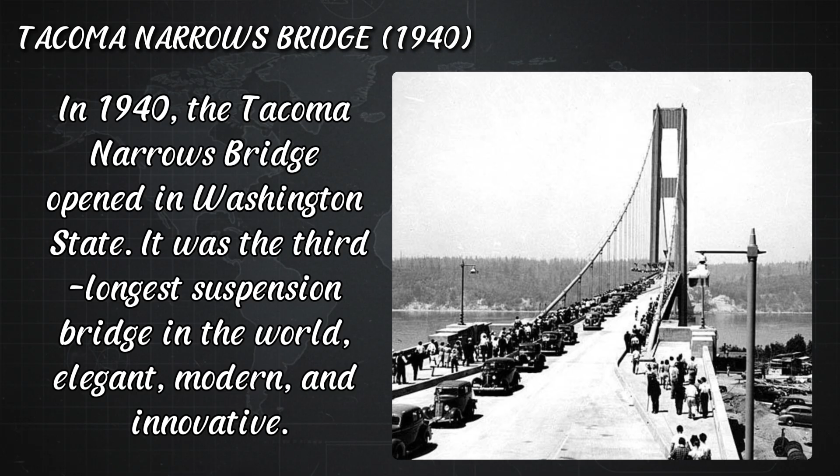The Tacoma Narrows Bridge, 1940. In 1940, the Tacoma Narrows Bridge opened in Washington state. It was the third longest suspension bridge in the world, elegant, modern, and innovative. Engineers had designed it to be lighter and more flexible than previous bridges, using a new streamlined deck design.

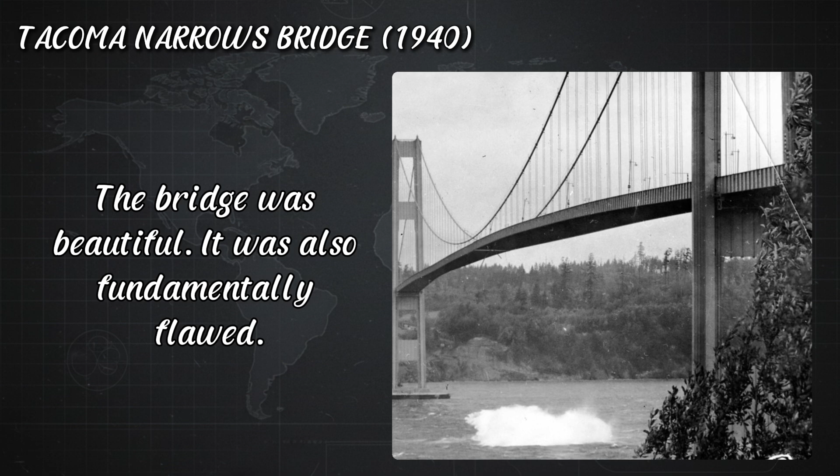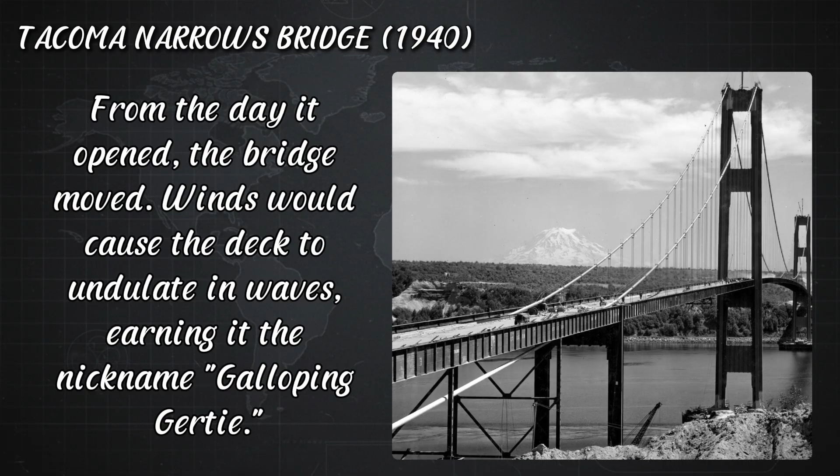The bridge was beautiful. It was also fundamentally flawed. From the day it opened, the bridge moved. Winds would cause the deck to undulate in waves, earning it the nickname Galloping Gertie. Drivers reported feeling seasick crossing it. Some people drove to the bridge just to experience the thrill of the rolling deck.

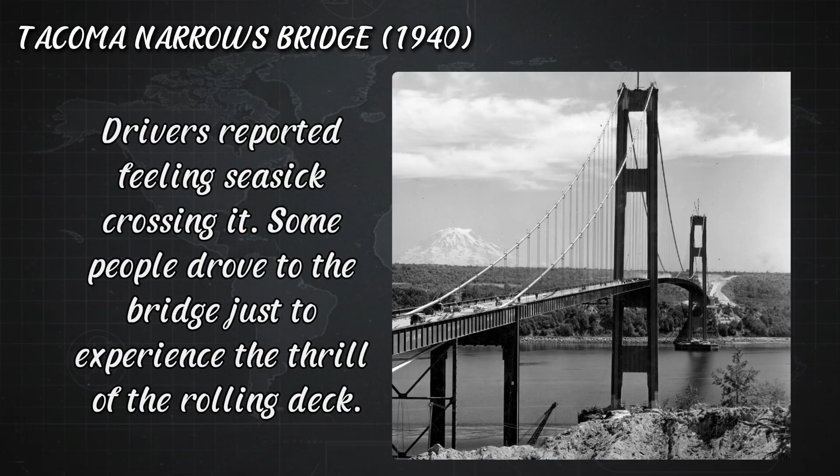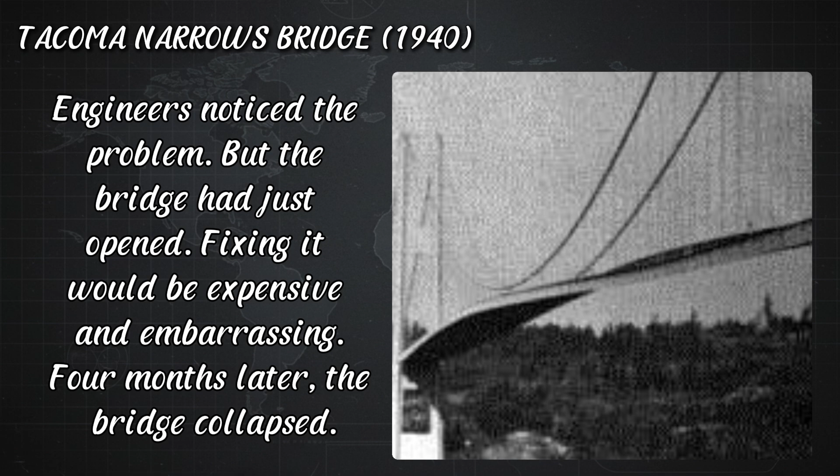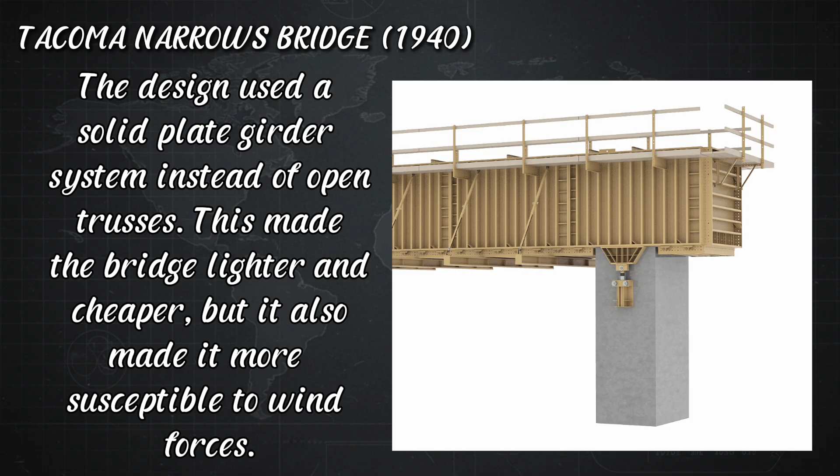Engineers noticed the problem, but the bridge had just opened. Fixing it would be expensive and embarrassing. 4 months later, the bridge collapsed. The design used a solid plate girder system instead of open trusses. This made the bridge lighter and cheaper, but it also made it more susceptible to wind forces. The narrow, flat deck acted like an airplane wing. Wind could create aerodynamic lift and torsion.

Civil engineer Leon Moisseff, the designer, had used mathematical formulas that worked for static loads, but he didn't account for dynamic wind forces, the way wind could interact with the bridge's shape to create oscillations. When engineers noticed the dangerous movements after opening, they proposed solutions: wind baffles, cable stays, modifications to the deck. All were rejected as too expensive or too disruptive to traffic.

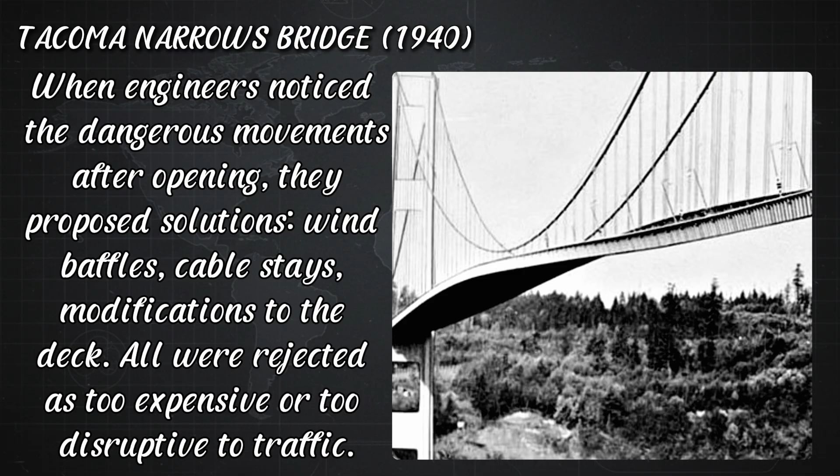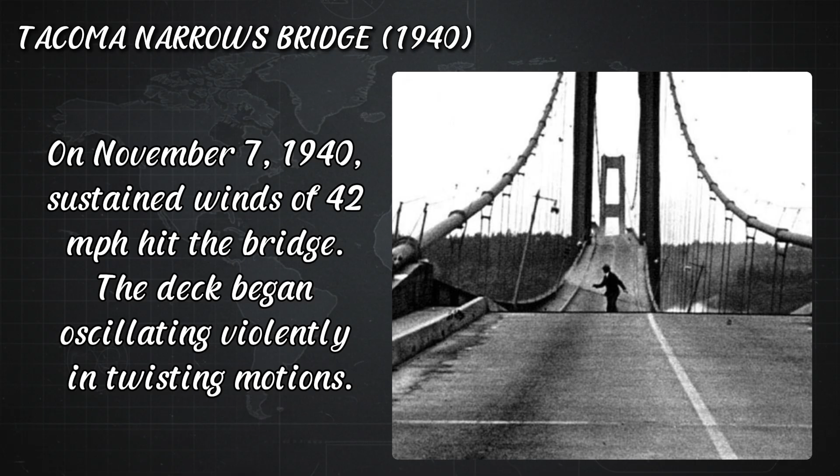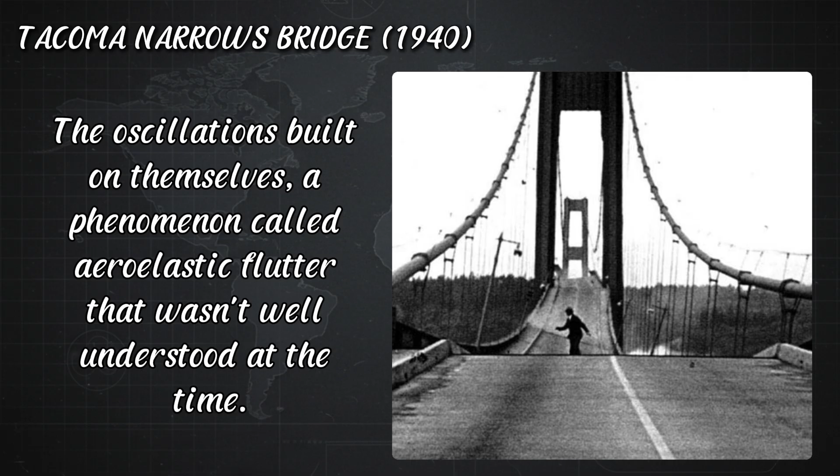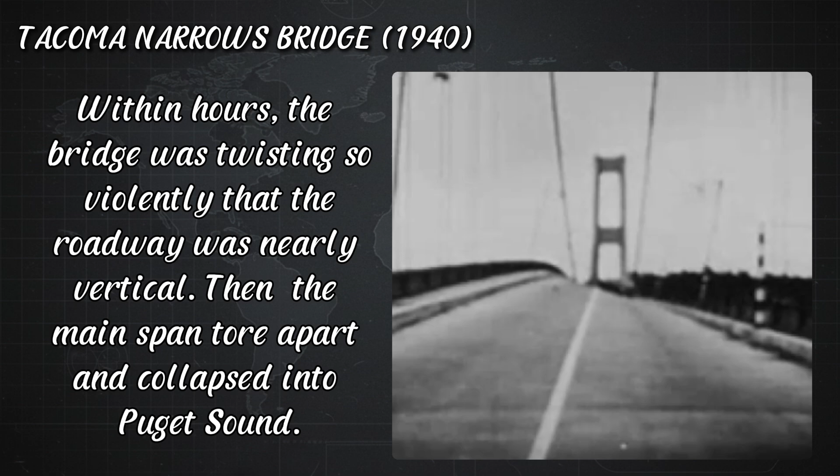What went wrong? On November 7, 1940, sustained winds of 42 miles per hour hit the bridge. The deck began oscillating violently in twisting motions. The oscillations built on themselves, a phenomenon called aeroelastic flutter that wasn't well understood at the time. Within hours, the bridge was twisting so violently that the roadway was nearly vertical. Then, the main span tore apart and collapsed into Puget Sound.

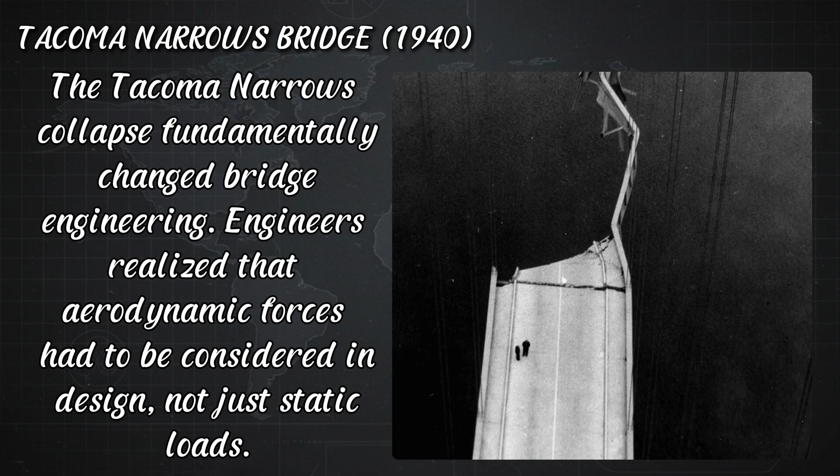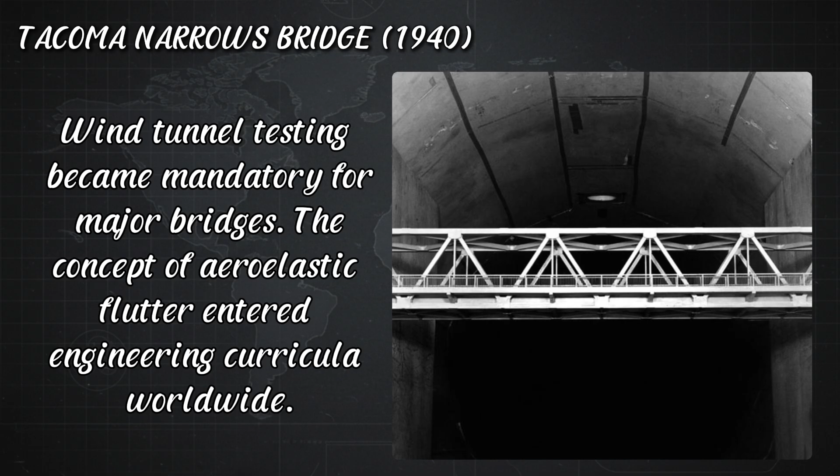The consequences. The Tacoma Narrows collapse fundamentally changed bridge engineering. Engineers realized that aerodynamic forces had to be considered in design, not just static loads. Wind tunnel testing became mandatory for major bridges. The concept of aeroelastic flutter entered engineering curricula worldwide.

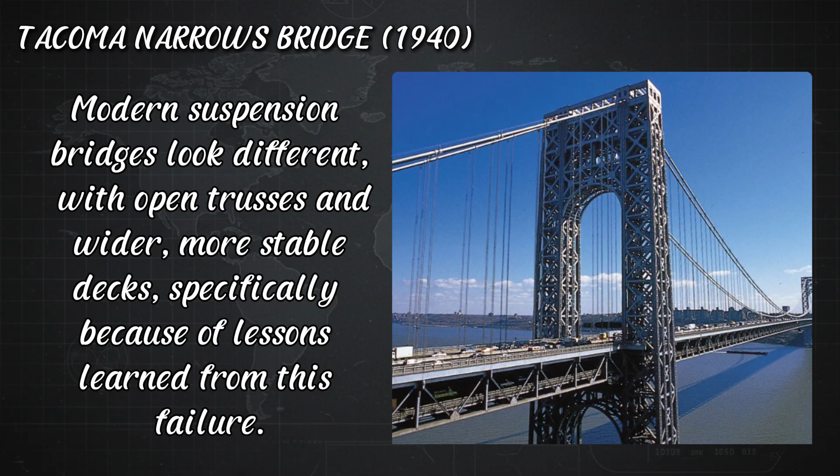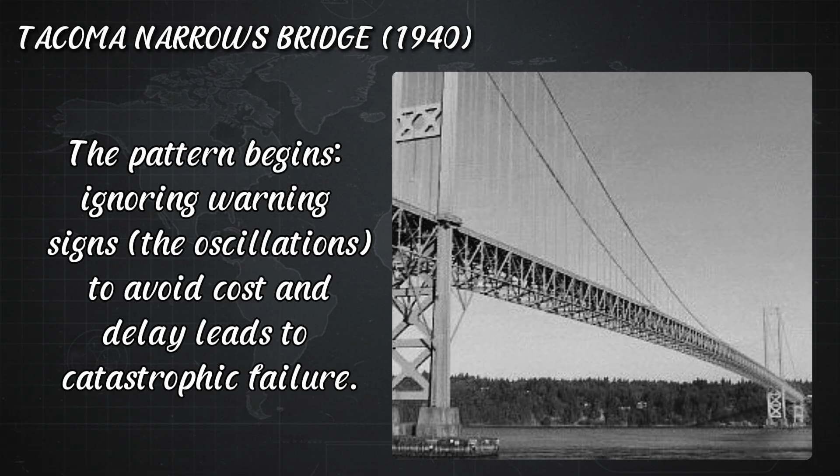Modern suspension bridges look different, with open trusses and wider, more stable decks, specifically because of lessons learned from this failure. The bridge was rebuilt in 1950 with a completely different design. It's still standing today. The pattern begins: ignoring warning signs, the oscillations, to avoid cost and delay leads to catastrophic failure.

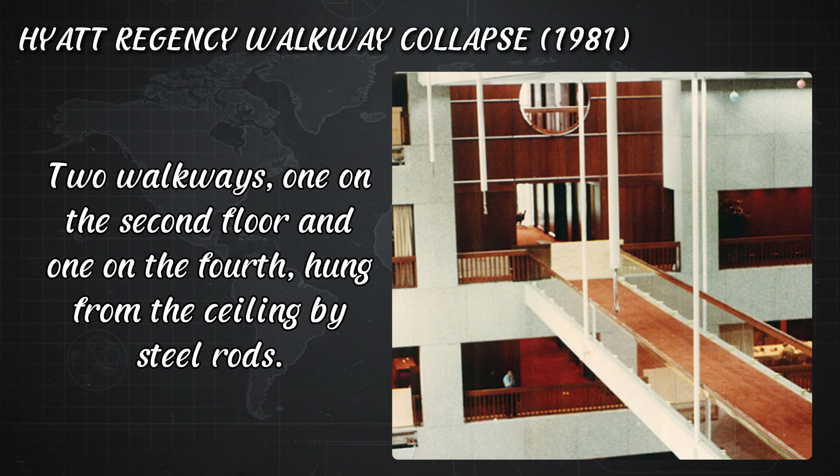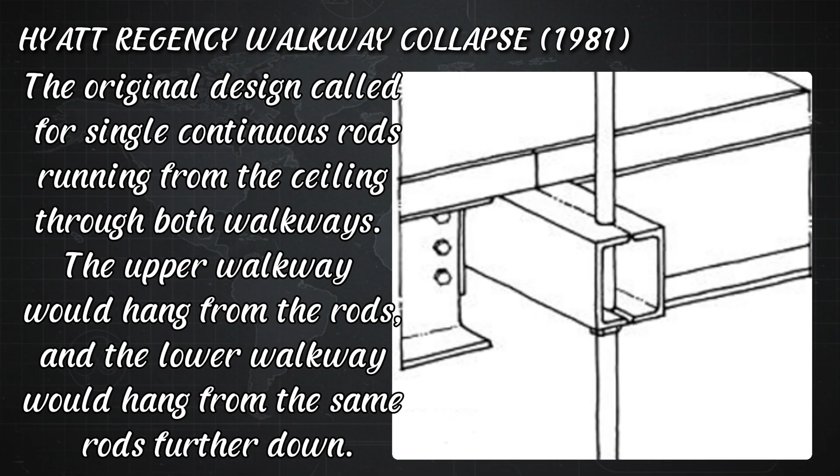The Hyatt Regency Walkway collapse, 1981. The Hyatt Regency in Kansas City was a stunning modern hotel featuring a multi-story atrium with suspended walkways connecting the buildings across the open space. 2 walkways, one on the 2nd floor and one on the 4th, hung from the ceiling by steel rods. The original design called for single continuous rods running from the ceiling through both walkways. The upper walkway would hang from the rods, and the lower walkway would hang from the same rods further down.

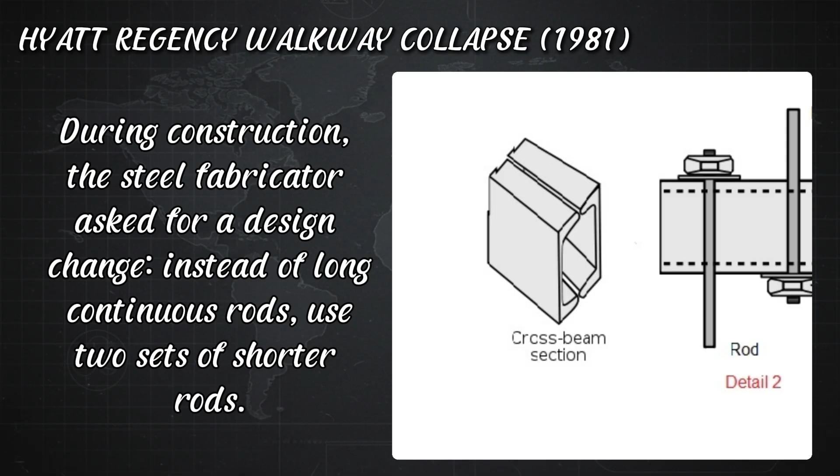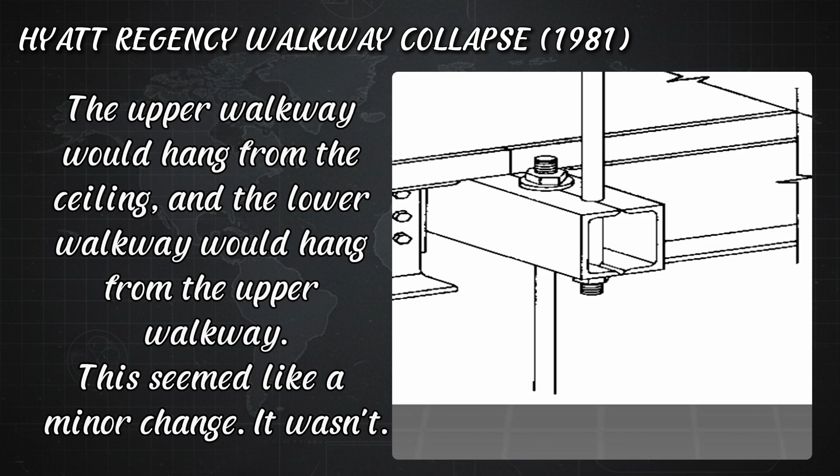During construction, the steel fabricator asked for a design change. Instead of long, continuous rods, use 2 sets of shorter rods. The upper walkway would hang from the ceiling, and the lower walkway would hang from the upper walkway. This seemed like a minor change. It wasn't. The original design had each walkway supporting only its own weight. The modified design meant the upper walkway had to support both its own weight and the lower walkway's weight, essentially doubling the load on the critical connection points.

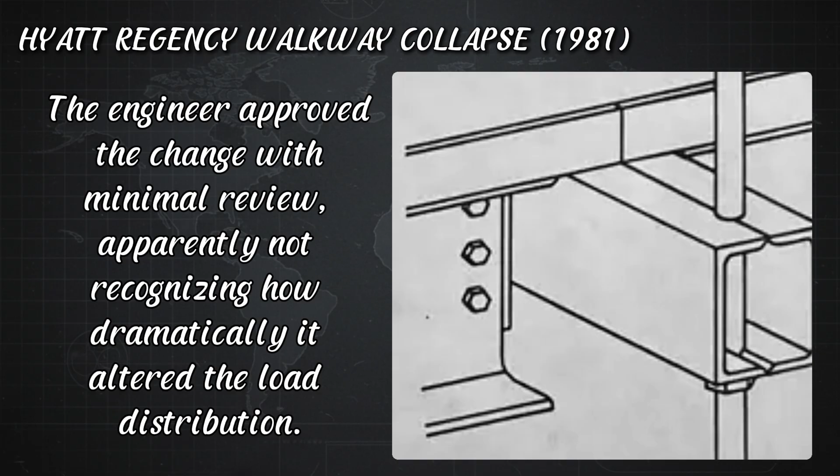The engineer approved the change with minimal review, apparently not recognizing how dramatically it altered the load distribution. The fabricator thought the engineer had done the calculations. The engineer thought the fabricator understood the implications. Nobody properly analyzed the modified design.

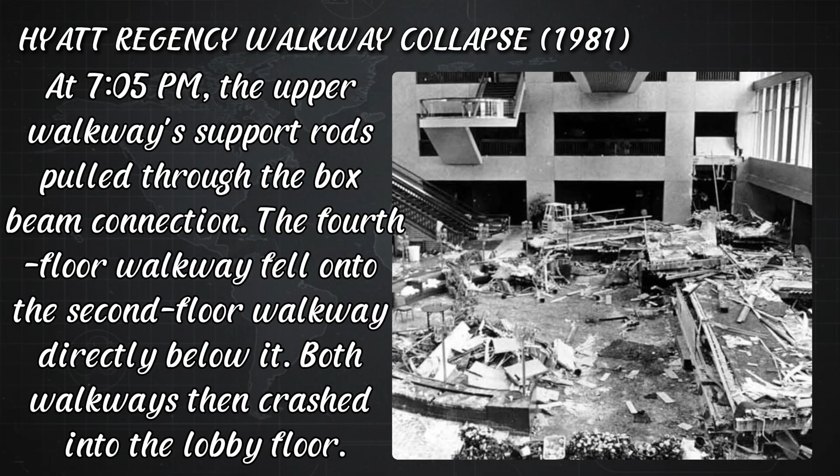What went wrong? On July 17, 1981, the Hyatt Regency hosted a popular tea dance in the atrium. Approximately 1,600 people packed the lobby and walkways to watch and participate. At 7:05 p.m., the upper walkway's support rods pulled through the box beam connection. The fourth-floor walkway fell onto the second-floor walkway directly below it. Both walkways then crashed into the lobby floor.

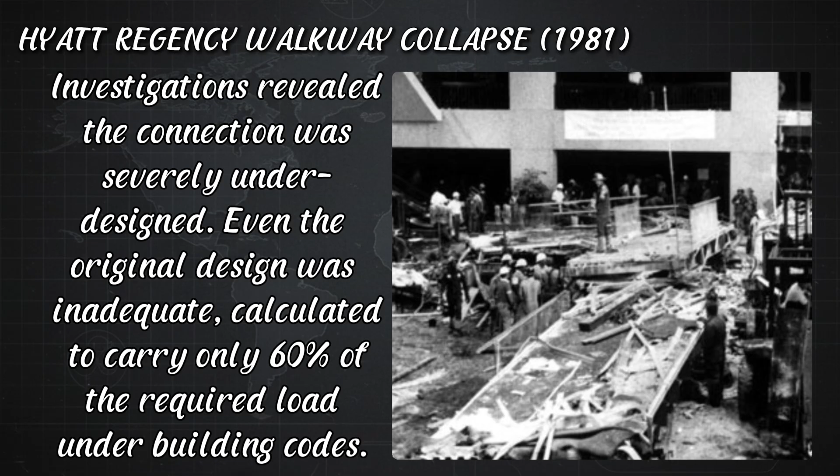114 people were killed. Over 200 were injured. It remains one of the deadliest structural failures in U.S. history. The consequences. Investigations revealed the connection was severely underdesigned. Even the original design was inadequate, calculated to carry only 60% of the required load under building codes. The modified design cut the load capacity in half.

The engineers had stamped drawings they hadn't properly reviewed. The contractors assumed engineering approval meant the design was safe. Communication failures and lack of oversight allowed a fatally flawed design to be built. Both the engineering firm and individual engineers lost their licenses.

The disaster led to major reforms in engineering liability, drawing review processes, and the professional responsibilities of engineers. Kansas City updated building codes. Engineering ethics courses now teach the Hyatt Regency collapse as a case study in professional responsibility. The pattern continues. Design changes without proper analysis. Assumptions about who checked what.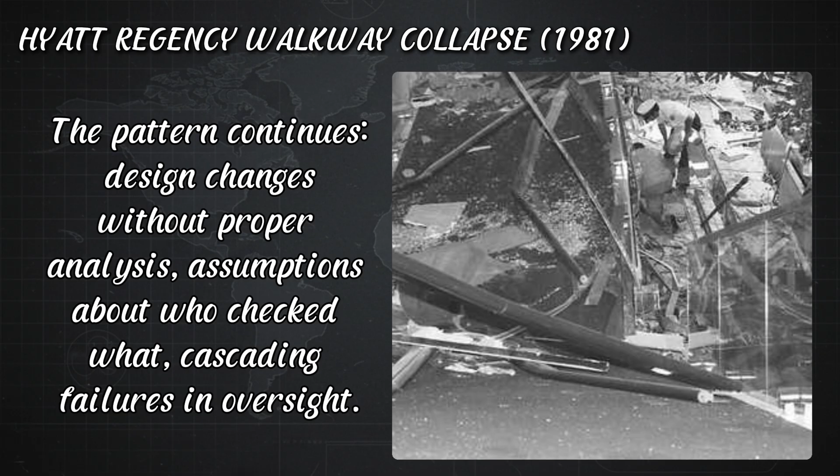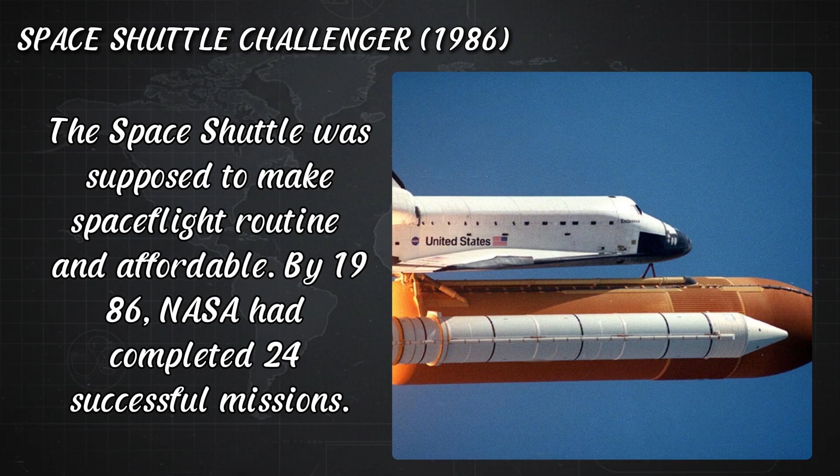Cascading failures in oversight. Space Shuttle Challenger, 1986. The Space Shuttle was supposed to make spaceflight routine and affordable. By 1986, NASA had completed 24 successful missions. The program was under intense pressure to maintain an ambitious launch schedule and demonstrate reliability.

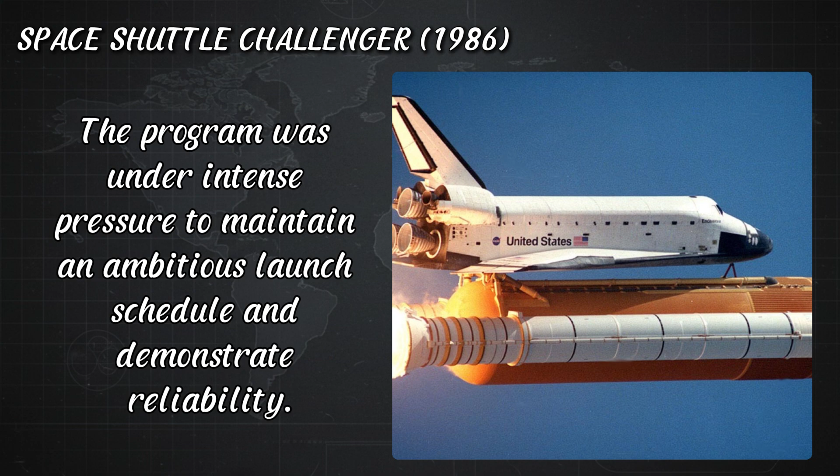The Challenger mission was special. It would carry Christa McAuliffe, a teacher, as part of the Teacher in Space program. Millions of school children would watch the launch live. Launch was scheduled for January 28, 1986. Overnight temperatures at Cape Canaveral dropped to 18 degrees Fahrenheit, far below the minimum temperature at which the shuttle was certified to fly.

Engineers at Morton Thiokol, the company that built the solid rocket boosters, were alarmed. The solid rocket boosters were constructed in segments, sealed by O-rings, rubber seals designed to prevent hot gases from escaping during launch. Engineers knew the O-rings became less flexible in cold temperatures. Previous launches had shown O-ring erosion and blow-by, hot gases leaking past the seals.

Engineers had documented this problem. They had warned management. They had explicitly stated that launching below 53 degrees Fahrenheit was dangerous. The night before launch, Thiokol engineers recommended postponing. They presented data showing O-ring problems correlated with cold temperatures.

NASA management pressured them to reconsider. There was schedule pressure, political pressure, media attention. The teacher was waiting. They couldn't keep delaying launches. Thiokol management overruled their own engineers and recommended launching.

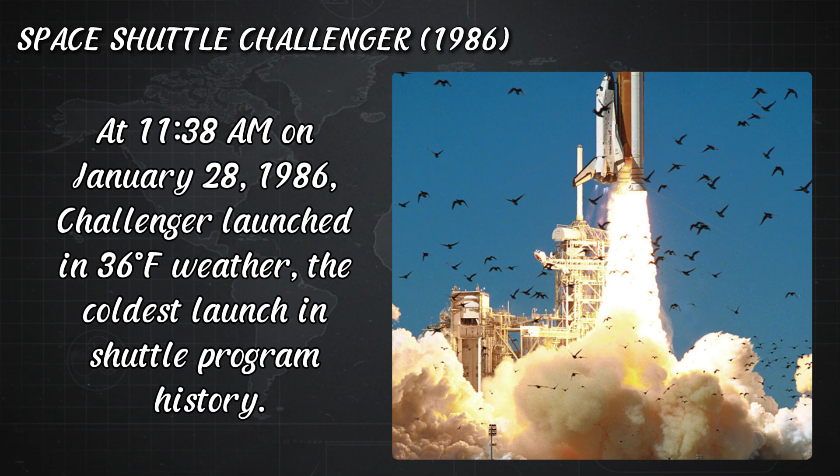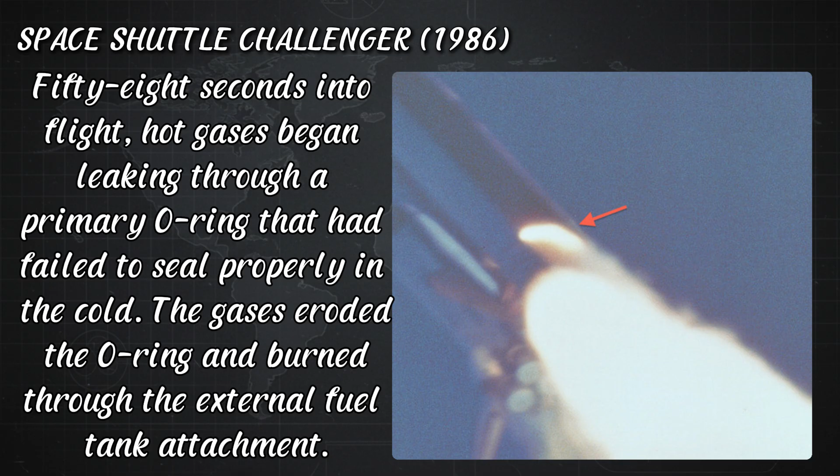What went wrong? At 11:38 a.m. on January 28, 1986, Challenger launched in 36 degrees Fahrenheit, the coldest launch in shuttle program history. 58 seconds into flight, hot gases began leaking through a primary O-ring that had failed to seal properly in the cold. The gases eroded the O-ring and burned through the external fuel tank attachment.

At 73 seconds, the external fuel tank ruptured. The resulting fireball destroyed the orbiter. All 7 crew members died: Francis Scobee, Michael Smith, Ronald McNair, Ellison Onizuka, Judith Resnik, Gregory Jarvis, and Christa McAuliffe. Millions of people, including countless school children, watched them die on live television.

The consequences. The Rogers Commission investigation found that NASA had known about the O-ring problem for years. Engineers had warned repeatedly. Risk assessments had been ignored or overruled because of schedule pressure. The Commission found NASA's organizational culture prioritized maintaining the launch schedule over safety. Management had normalized the O-ring problems, convincing themselves that because previous flights hadn't catastrophically failed, future flights would be fine.

Physicist Richard Feynman, a commission member, demonstrated the O-ring failure mechanism in a famous televised hearing by immersing a sample O-ring in ice water and showing how it lost flexibility. NASA grounded the shuttle program for 32 months. Safety procedures were overhauled. The O-ring design was changed. But the fundamental lesson, that schedule pressure and bureaucratic momentum can override engineering judgment, remains relevant.

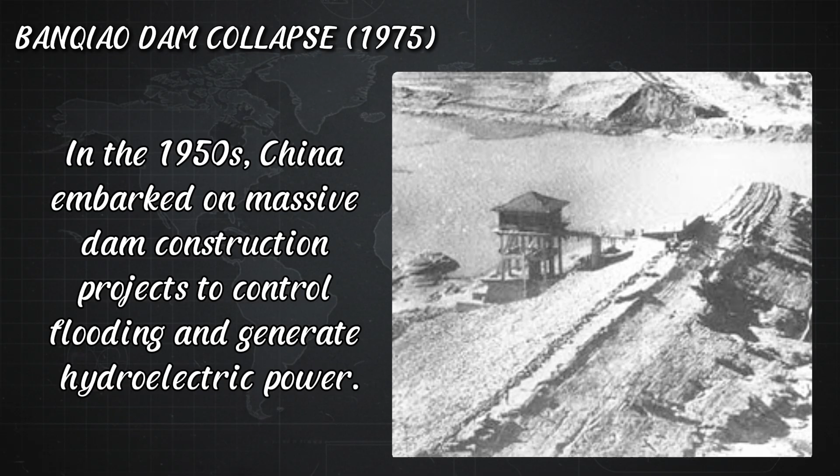The pattern. Known problems documented, warnings given. Management pressure overrides engineering judgment. Catastrophe results. The Banqiao Dam collapse, 1975. In the 1950s, China embarked on massive dam construction projects to control flooding and generate hydroelectric power.

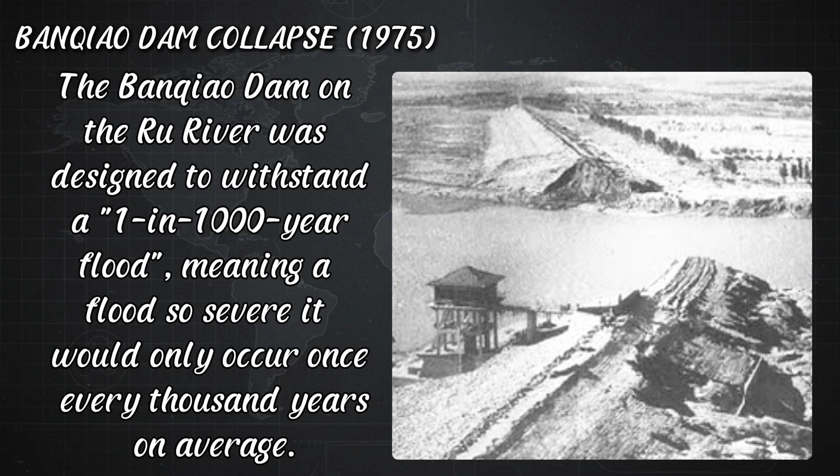The Banqiao Dam on the Ru River was designed to withstand a 1-in-1,000-year flood, meaning a flood so severe it would only occur once every 1,000 years on average. Chen Xing, a hydrologist, warned that the dam's design was inadequate. He advocated for more spillways and floodgates to handle extreme flooding. His warnings were ignored, and he was labeled a right-wing opportunist during the political climate of the era.

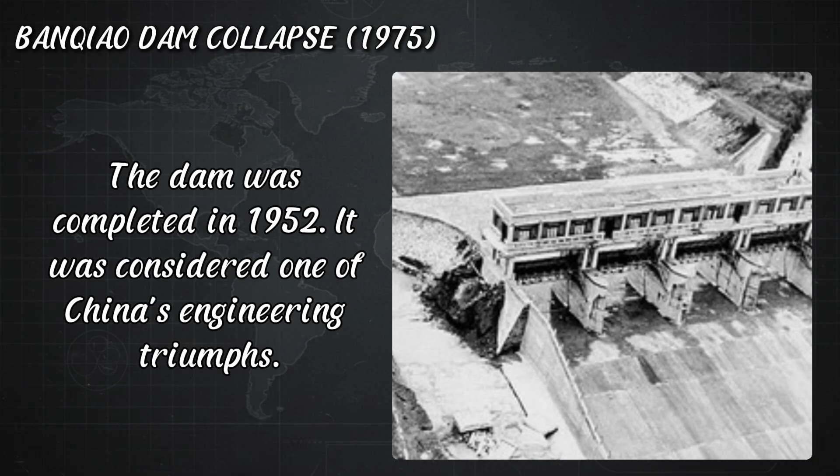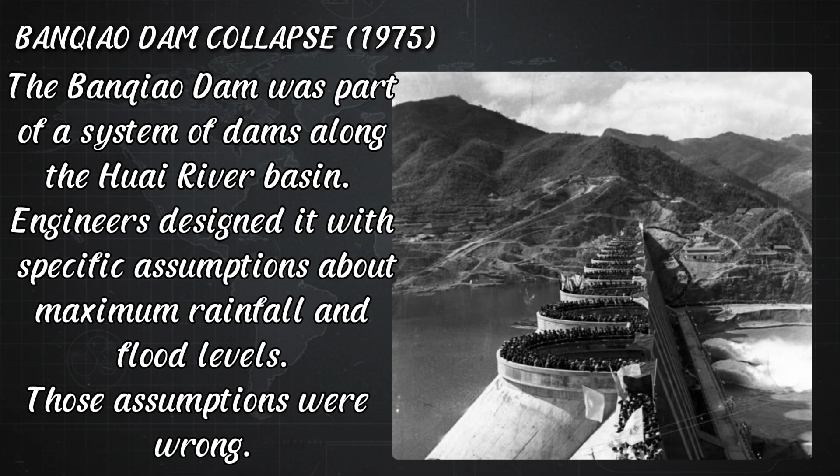The dam was completed in 1952. It was considered one of China's engineering triumphs. The Banqiao Dam was part of a system of dams along the Huai River basin. Engineers designed it with specific assumptions about maximum rainfall and flood levels. Those assumptions were wrong. In August 1975, Typhoon Nina stalled over the region and dropped a year's worth of rain in 24 hours. The Banqiao Reservoir filled faster than the spillways could release water.

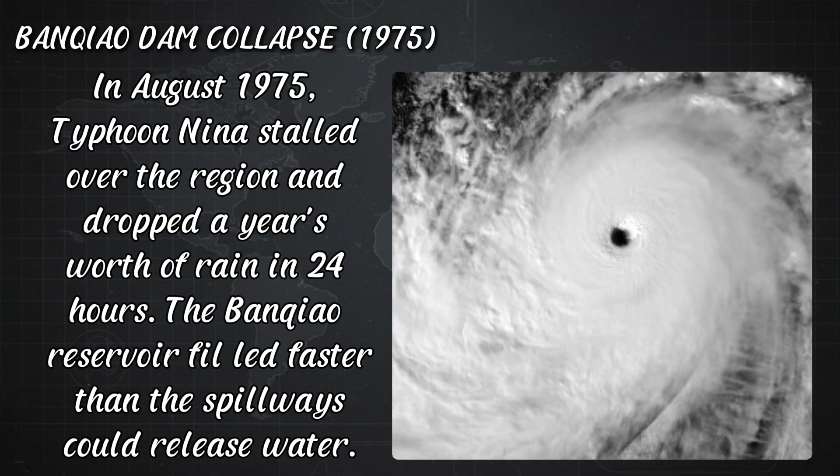Operators tried to open sluice gates to release pressure. Some gates were jammed with silt. Others had been designed too small. The dam wasn't built to handle this much water this quickly.

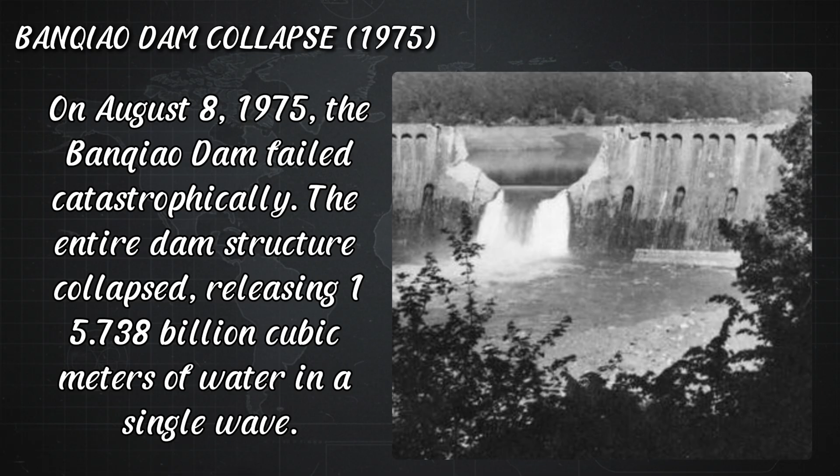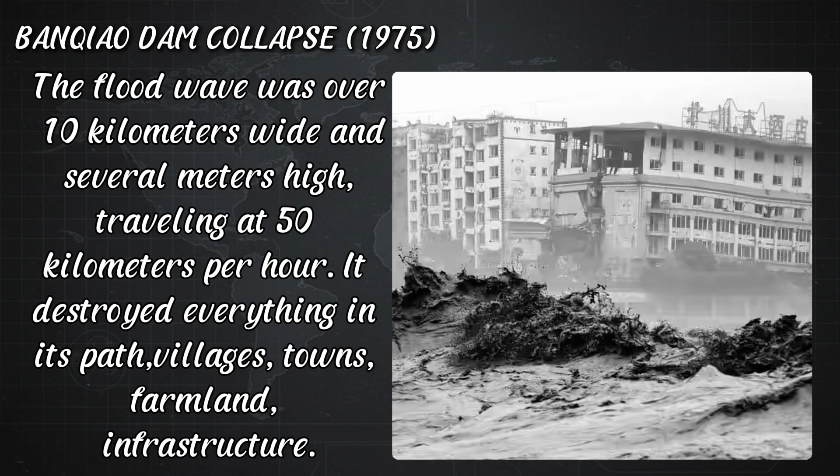What went wrong? On August 8, 1975, the Banqiao Dam failed catastrophically. The entire dam structure collapsed, releasing 15.738 billion cubic meters of water in a single wave. The flood wave was over 10 kilometers wide and several meters high, traveling at 50 kilometers per hour. It destroyed everything in its path: villages, towns, farmland, infrastructure.

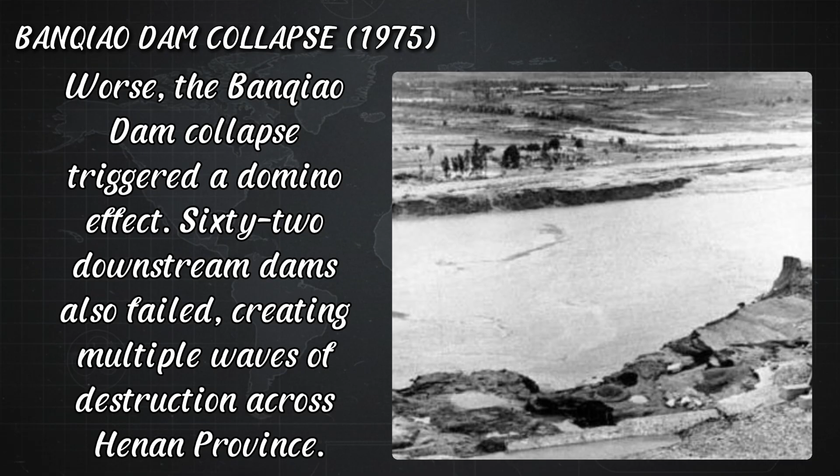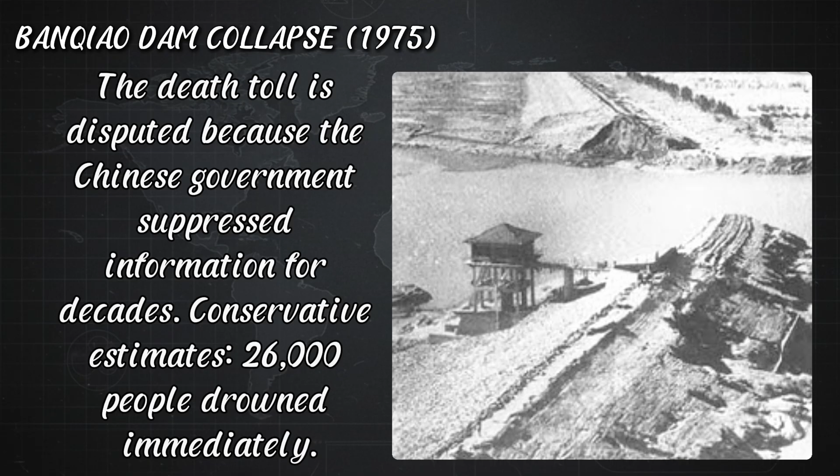Worse, the Banqiao Dam collapse triggered a domino effect. 62 downstream dams also failed, creating multiple waves of destruction across Henan province. The consequences. The death toll is disputed because the Chinese government suppressed information for decades. Conservative estimates: 26,000 people drowned immediately. Another 145,000 died from famine and disease in the aftermath. Some estimates put total deaths as high as 230,000.

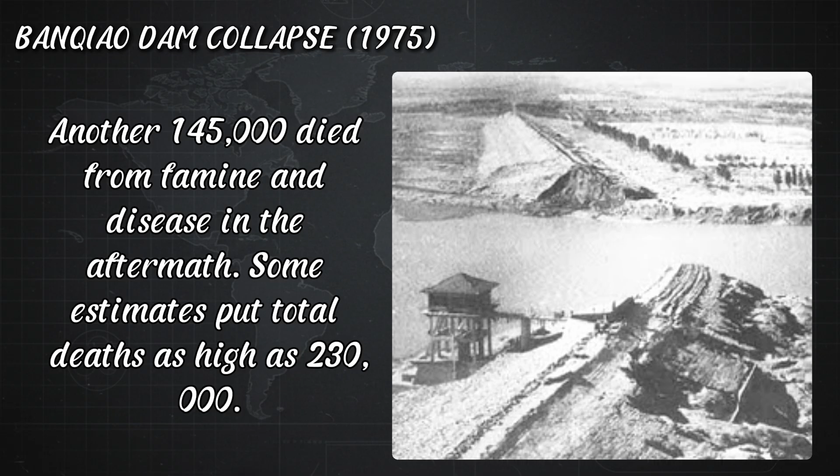11 million people lost their homes. The disaster destroyed infrastructure, agricultural land, and economic productivity across a vast region. The Banqiao Dam failure is considered the deadliest structural failure in human history. Yet most people have never heard of it because the Chinese government classified it as a state secret for decades.

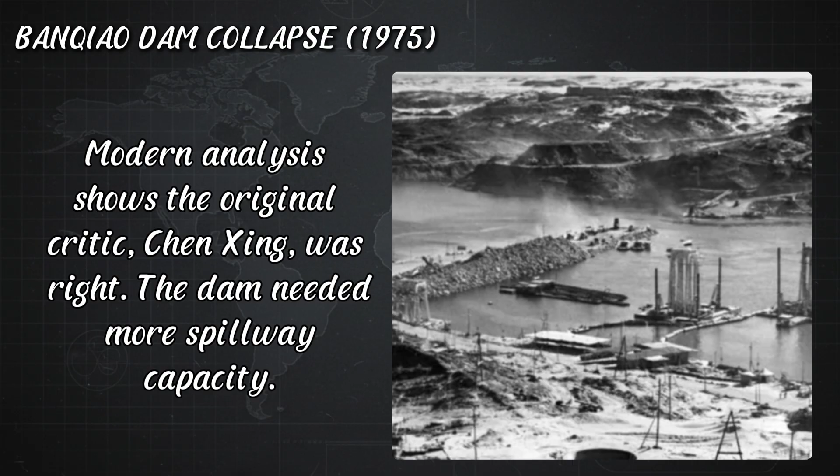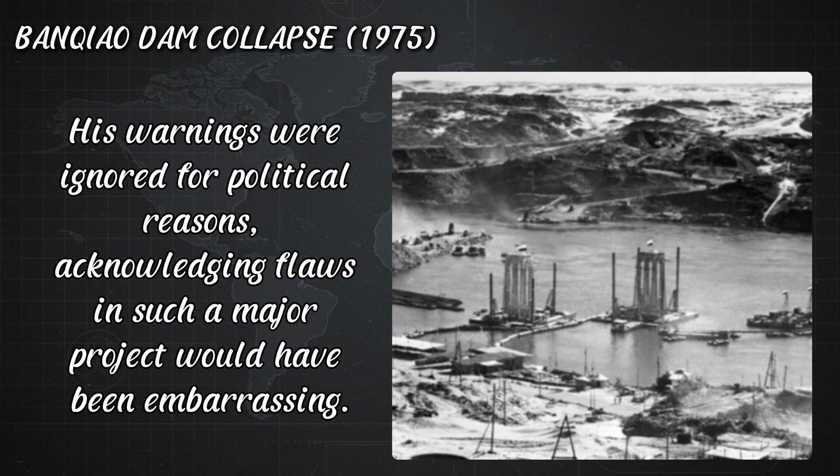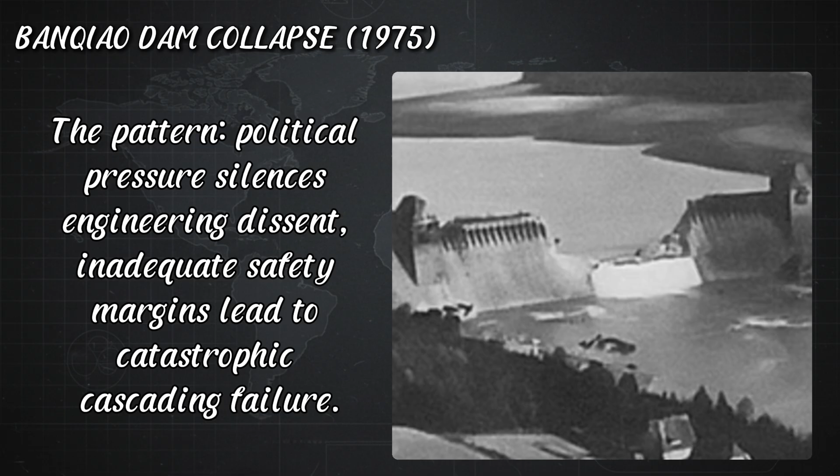Modern analysis shows the original critic, Chen Xing, was right. The dam needed more spillway capacity. His warnings were ignored for political reasons. Acknowledging flaws in such a major project would have been embarrassing. The pattern: political pressure silences engineering dissent. Inadequate safety margins lead to catastrophic cascading failure.

Grenfell Tower Fire, 2017. Grenfell Tower was a 24-story residential building in West London. Built in 1974, it underwent a major renovation in 2016 to improve its appearance and energy efficiency. The renovation added external cladding, aluminum composite panels with a polyethylene core to improve insulation and modernize the building's appearance. This was common practice in modern building retrofits.

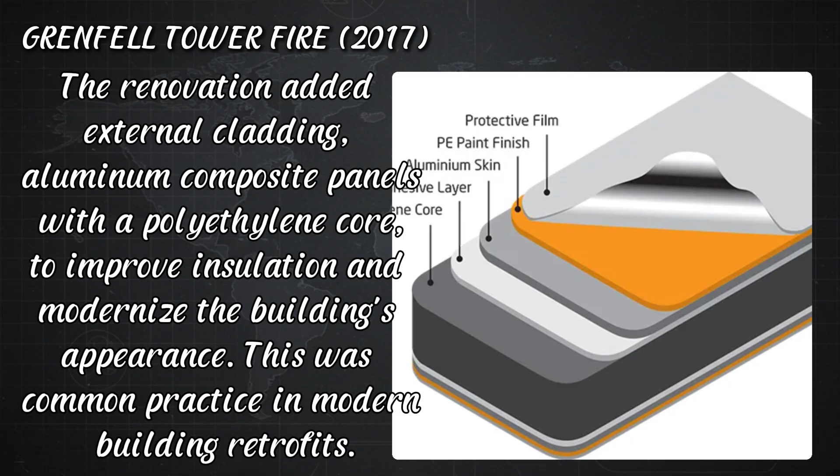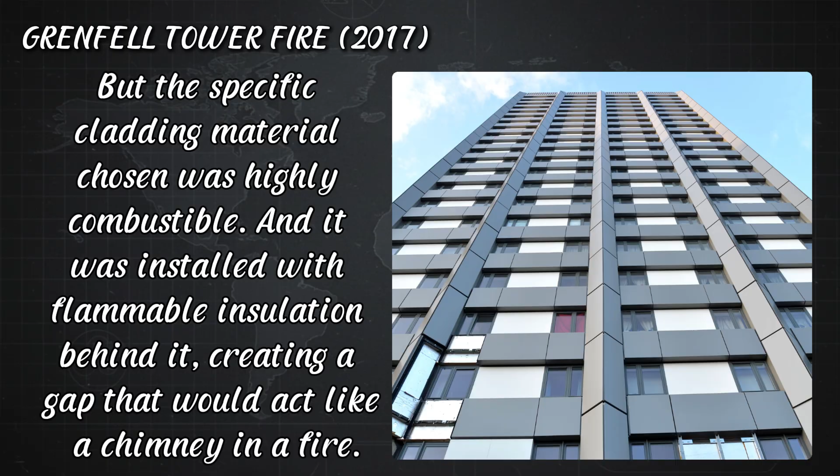But the specific cladding material chosen was highly combustible, and it was installed with flammable insulation behind it, creating a gap that would act like a chimney in a fire. Residents had repeatedly raised safety concerns. They warned that there was only one stairwell for evacuation. They noted that fire safety equipment wasn't working. They complained to management. Those warnings were ignored or dismissed.

On June 14, 2017, a refrigerator in a fourth-floor apartment malfunctioned, starting a small kitchen fire. Under normal circumstances, this would have been contained to a single apartment. UK building codes are designed with compartmentalization in mind. But the fire spread to the external cladding.

The aluminum composite panels had a polyethylene core, essentially plastic sandwiched between thin aluminum sheets. When heated, the plastic ignited. The cladding burned rapidly, spreading flames up the outside of the building. The gap between the cladding and the building acted as a chimney, accelerating the fire's spread. In minutes, flames engulfed the entire 24-story tower.

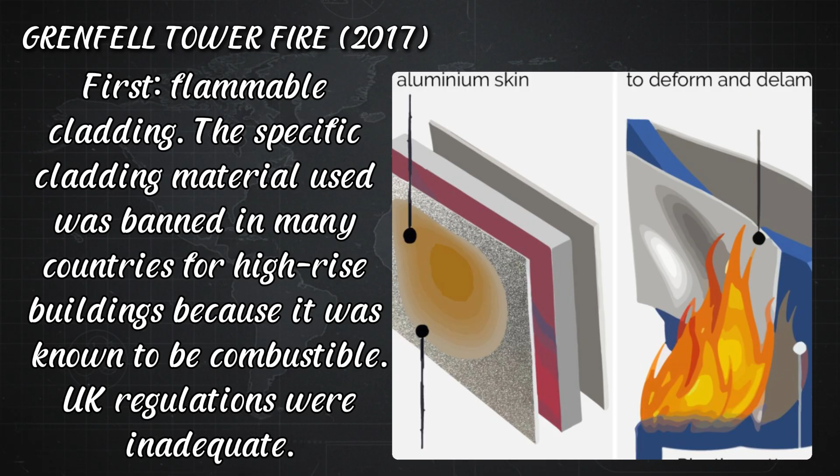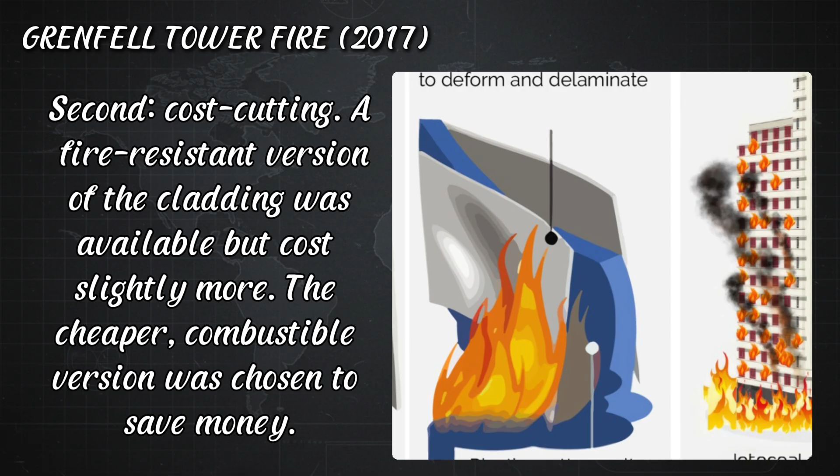What went wrong? First, flammable cladding. The specific cladding material used was banned in many countries for high-rise buildings because it was known to be combustible. UK regulations were inadequate. Second, cost-cutting. A fire-resistant version of the cladding was available, but cost slightly more. The cheaper, combustible version was chosen to save money.

Third, regulatory failure. Building regulations didn't adequately address cladding fire safety. Testing standards were insufficient. Enforcement was weak. Fourth, ignored warnings. Residents had formed a Grenfell action group that repeatedly warned about fire safety issues. Their blog post from 2016 predicted only a catastrophic event would force authorities to address the problems. They were tragically correct.

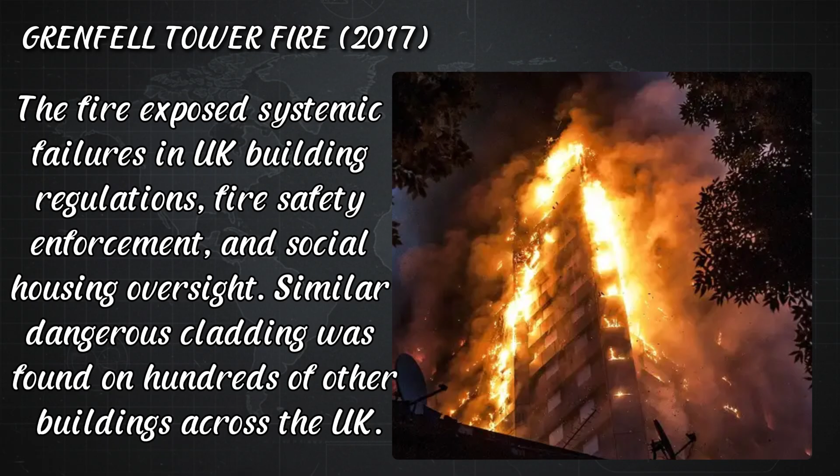The consequences. 72 people died in the Grenfell Tower fire. Many more were injured. Survivors were traumatized. An entire community was destroyed. The fire exposed systemic failures in UK building regulations, fire safety enforcement, and social housing oversight. Similar dangerous cladding was found on hundreds of other buildings across the UK.

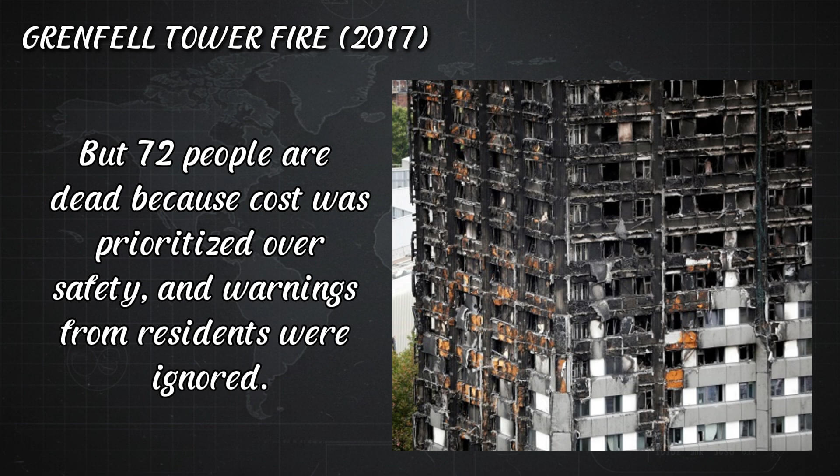A public inquiry is ongoing. Criminal investigations continue. Building codes have been overhauled. The UK government has spent billions removing dangerous cladding from buildings. But 72 people are dead because cost was prioritized over safety, and warnings from residents were ignored.